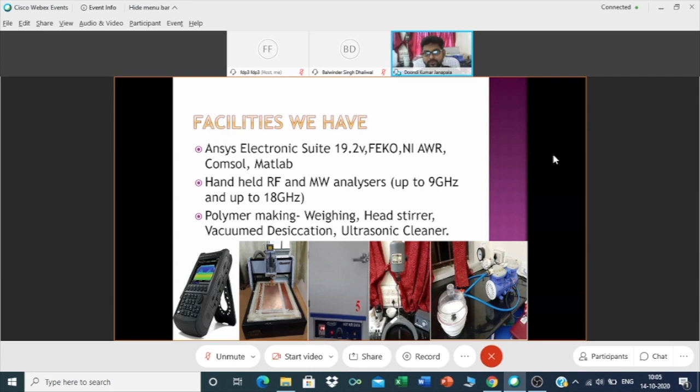So these are the current major things that I am working on currently. The remaining things I work on occasionally, but mostly I work on flexible antennas for wearables, especially for medical applications and medical antennas. I am working on both assistive devices and diagnostics, and also attempting therapeutics. I am developing some polymers for use as substrates for antenna fabrication or sensor fabrication, and I recently started working on conductive materials too.

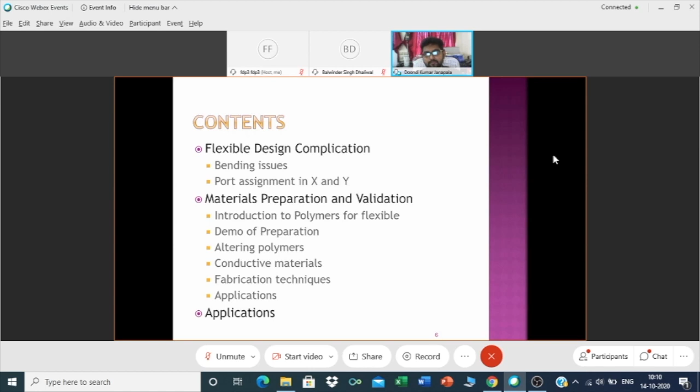Next thing is you can customize your own flexible material, and I can show you how to prepare that, how you can alter it, and how you can characterize it, and what are the conductive parts you can go for and how the fabrication techniques evolve based on the conductive material you take and the applications. So this is what I'm going to discuss during my entire session. I think this will be a complete guideline for starting your research and ending your research.

Now the main mistake anybody will do is they take the flat design very easily, as you can see here. But while bending, they make a common mistake where they just cut based on the bending radius. They take a few bending radiuses and give a comparison analysis. But how exactly can I do proper bending? That is the big question here. So in order to understand that, I will go to the next slide.

Suppose I'm going to bend my antenna, my particular substrate. Here you can see the inner radius is there and the outer radius is there. If I just cut it flat, the inner radius length is lesser than the outer radius length. If you are not taking care of that in your simulation, that means you're not having the length of your antenna properly at the bottom side and the top side, because the top side length of the antenna is more than the bottom side length. So that is the common mistake everybody makes.

Here you can see this is the excess part. This is the excess part one should remove when designing. Only then will you get the length of your antenna properly on the top side as well as the bottom side, only when you remove this particular part. So if you address this part only, your bending design in HFSS will come out properly.

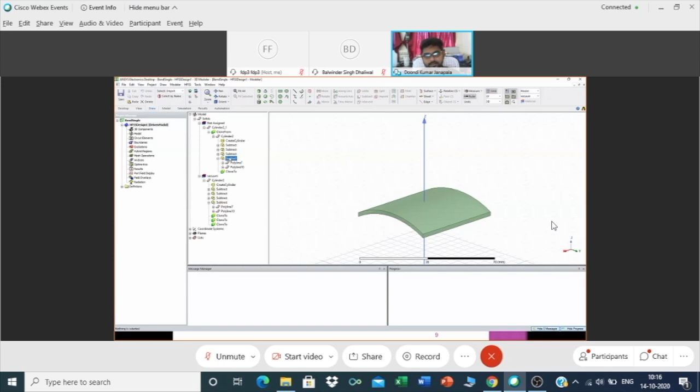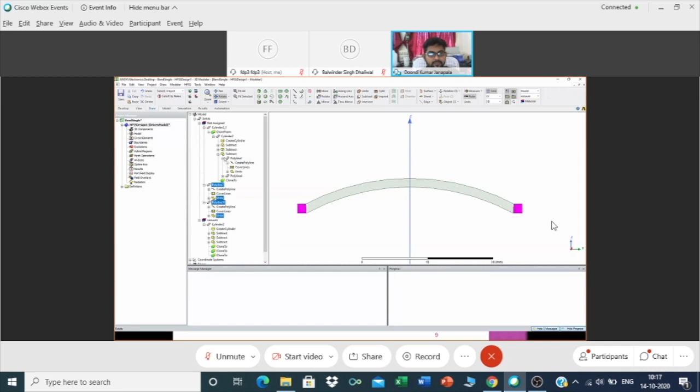These are the two extra parts one must eliminate while doing their design. These two parts need to be removed. If the extra part is not removed properly, then we will have a problem matching your simulated and measured results.

So for that one, we made a lot of calculations and did a lot of design especially for this. As most of you know, this simulation tool is HFSS, we have the 19.2 version here. At the initial stage, we take a cylinder, cylinder 1 and cylinder 2. Cylinder 2 contains cylinder 1, and the radius inside is what you want to bend.

Based on that, you will make it, and the upper cylinder will take into consideration the thickness of the substrate that you want. So you do that and subtract cylinder 1 from cylinder 2, then you will have a hollow space, a hollow cylinder here.

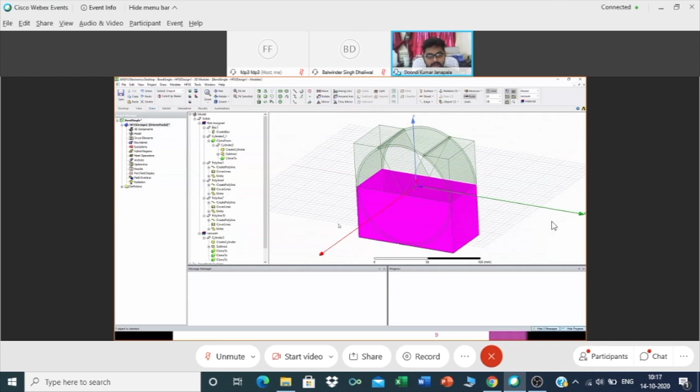Then after that, first you take a box and remove this first part, half part. That means you select your hollow cylinder first, and remove that box part, then you will get this particular part. Here is where our particular calculation comes into handy.

Now here you can see this line. This line, usually based on your 2 pi, this particular length, you will calculate how exactly you have to take the angle and take this one. But if I straightly remove this one, here you can see this is the extra part that is still remaining, so first you have to calculate and remove this part.

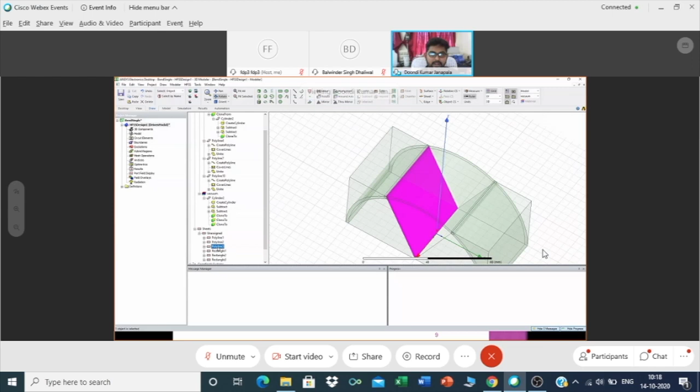For this one, I have selected individual lines, polylines. You can see these lines are all individually arranged together, so you can go for polyline sheets. First I draw only this particular face, then I drew similarly the backside one, then I drew this particular slant one, then I drew this particular one.

So on the bottom one and top one, after I made individual sheets, I united them and made a box. That particular box, the hollow half cylinder that we have here, you can see sx by 2, sx by 2 minus y1.

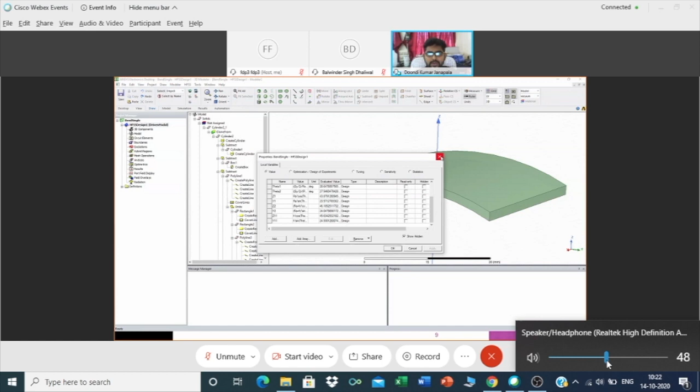So you give these equations, you enter them into your design properties, and instead of coordinates, you give your variables everywhere in your design. So everywhere in your design you can see all are done with variable instead of coordinates.

What it will help is, suppose now I want to work with some 30, I will enter 30. See the bending change it, you can see the bending change. Now I am going to go with the 70. See the bending change it.

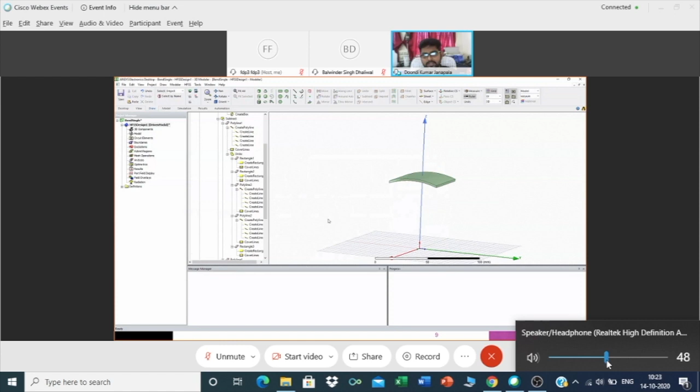Now again I want to give some 50, and the radius in axle length I want to reduce to just 20. Press OK, and you can see the length is reduced. Sorry, width is reduced. So this is the advantage of making your design with variables in the simulation tool.

If you are able to do this based on the calculation I have shown in those two slides, then your simulation time will be very easy, and probably you can use parametric study and do your simulation as fast as you can with the various number of radiuses.

Because when you do your flexible design, it's not necessary that you will get a proper reflection coefficient for every bending you do, because there is a limit up to what radius you can do bending. Beyond that, if you bend, your reflection coefficient may not come in the frequency you need, and it may not radiate properly either. So there is a limit to bend.

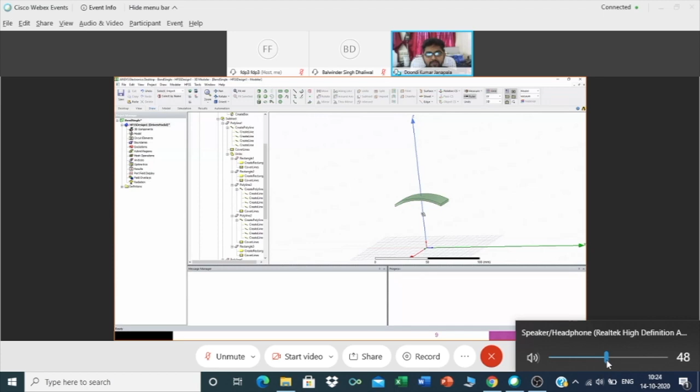So this particular way of design will help you find exactly what bending radiuses you can select, and you can compare for your research article. That is why I want to take 15 minutes to show you this thing before I go to my original presentation. I hope these calculations will be helpful for you in maintaining and doing your design easily.

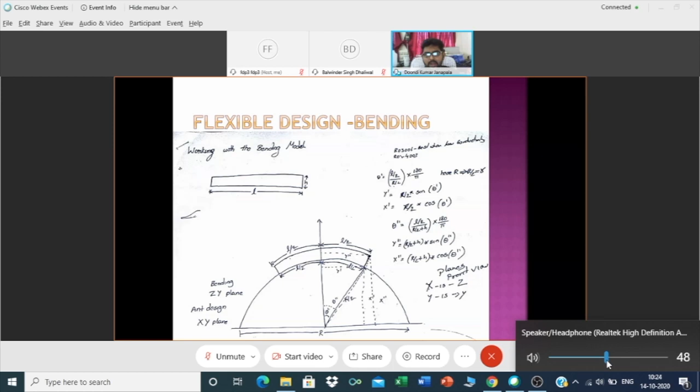So these are the calculations. This is the calculations that we did for everything, and you have to take note of these things only, and you have to enter them there, and you will get your bending design very easily. So I wanted to address this particular part while doing that.

Now, this particular thing is done. Now what are the other complications that you may face? Two complications you will face. So people either want to bend in x direction or y direction.

Suppose I want to bend here. So my antenna strip line is here. My antenna is bended like this. So bended like this in x bend. So my strip line is like this. Then in such cases I need to give the port here. But if I bend in y direction, then I have to give my feed here.

So how exactly you do this particular port assignment with the exact calculation? So that also I'm going to address. This particular modeling of the port in x direction is similar to the bending design that we did. So the calculations are similar here.

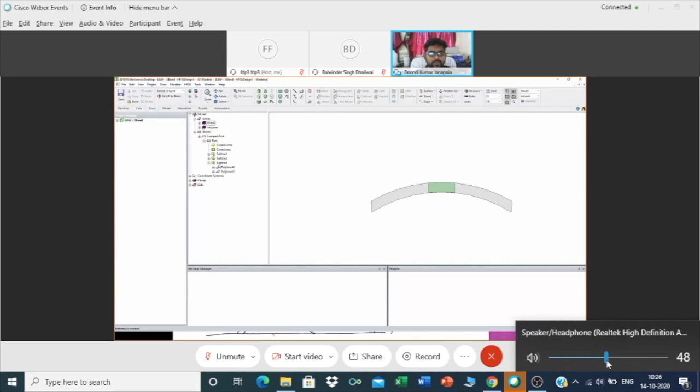So here I would like to show you that by removing also. See, whatever the design that I showed you before, now I'm showing the same thing in a 2D. So first I took a 2D plane of cylinders, a 2D plane of circular discs, and I made a hollow part. So after making a hollow part, bottom part removed and the edge parts removed. So the particular thing has come.

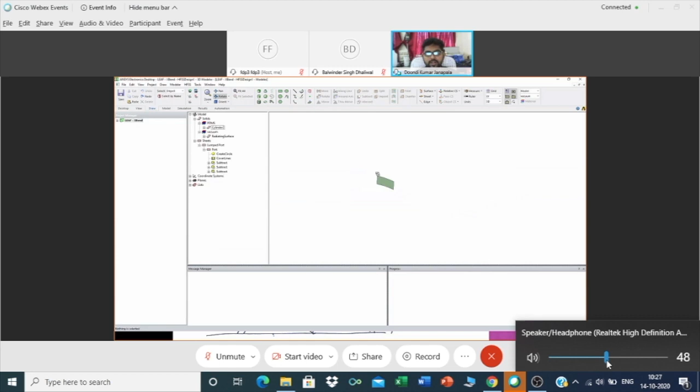Now in the previous design, if you are interested, do that from scratch and you will get enough practice. But if you want to finish your design a little easier, and you don't want to do the entire 3D modeling and only want to do 2D modeling and then get the 3D model, here's how you can do that very easily. I'm going to hide this view, hide in all views.

Now you can see only a small arc in 2D. Now in HFSS design properties, instead of fx, I will give some value like 20. So my length of my substrate suppose is 20. Based on that, I did only 2D modeling.

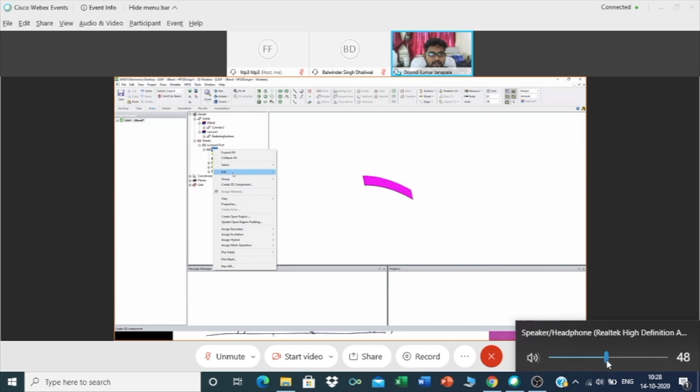Now I will select this, go to edit, surface, thicken sheet, and give some length. Suppose imagine the width of my antenna is also 20. Now you can see, so this is how you replicate only a 2D design and get your substrate easily with 2D modeling. You just need to set the thickness of whatever width you need using the thickness option.

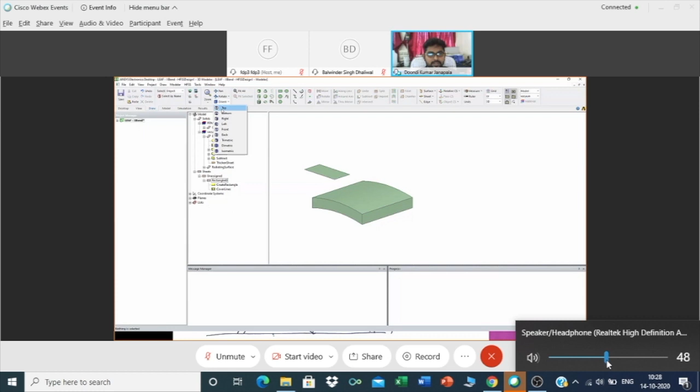The same thickness option is used sometimes when working with different conducting parts. Suppose you are having one sheet here, so you are wrapping that, and I will show you this also. Probably minus 2 comma minus 2 comma some 100.

As you can see, I will select this one and this one. Okay, edit, surface, wrap sheet. Okay, sorry, this length is a little less, I think.

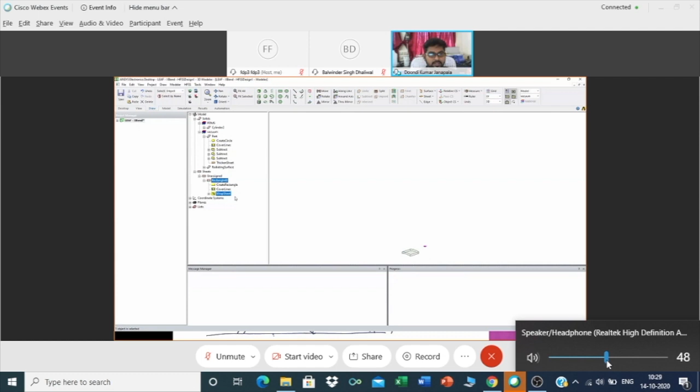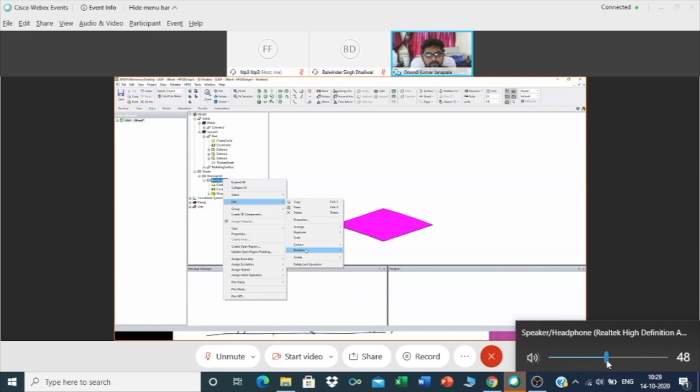So what I want to show is, if you want to work with some silver nanoparticles or copper nanowires or something and you know the conductivity value, normally most of the time when you use the simulation tool, we just select this particular part and for the radiating part we assign boundaries and perfect E. But instead of that, you can just give edit, surface, and thicken sheet, and give, suppose you're working with some 35 micrometer coating or something, you can give that and press OK, and you can see it got some thickness.

You can particularly select that one, and instead of vacuum you can select that particular material, add material, suppose silver or something, and give the relative conductivity value and validate your material and press OK. So in that way you can assign a particular conductive material that you are choosing for your fabrication. You just thicken your sheet and assign that value. So that is the thing I wanted to show.

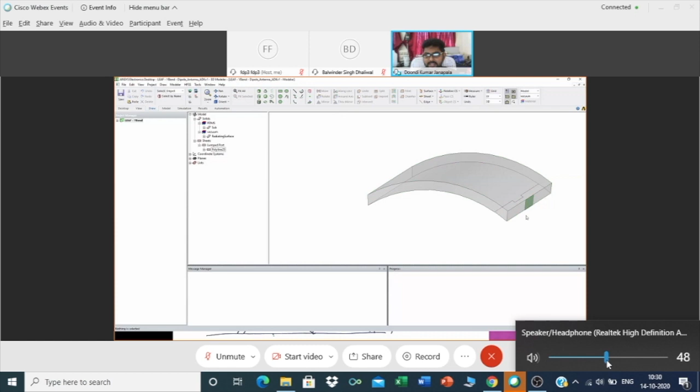In a similar way, another one is this one. This one is actually quite easy. The port assignment in Y bending is quite easy. Now imagine your strip line is here and your antenna is bent in this orientation. Now your port is here. For this port, this is a very simple one compared to the port in the X direction.

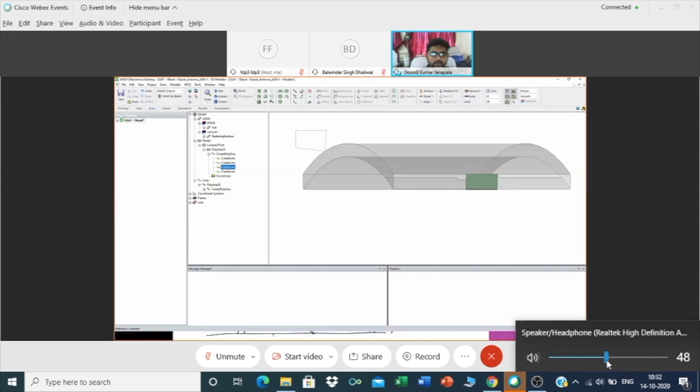So this is how you do X bend and Y bend, and the port assignment is different in X bend and Y bend. The calculations are simply different. Compared to X bend, giving the port in Y bend is quite easy because you don't need to do much here. You just take a sheet and give the coordinates, that's it. But for X bend, the port calculations are similar to the bend design we do. So that is one thing you should take care of, and it will take some time. In this way, we can go from single bend to multiple bends. So I wanted to show you these two.

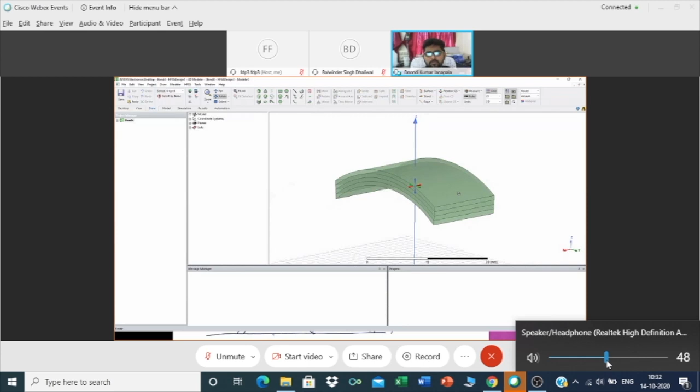So here you can see I have done 4 layers of this particular one. Suppose if you are having a very good system and processor capabilities, if you want to do SAR analysis, you can select the phantom models available directly in the license version of ANSYS HFSS and use them. But what if you don't have that phantom model, or it's taking too much memory consumption and you don't have enough memory to compute all these things using the real-time phantom model?

In such cases, most people go for a 4-layered model of skin human tissues. The layers are skin around 2 mm, fat around 5 mm, muscle around 7 to 10 mm, and bone around 10 mm or so. So you take that as the flat condition.

Now I am giving you a glimpse of how you can take that 4-layered structure in a bending condition also. Once you do one bend, it's very easy to do a number of bends. The same procedure only I will follow, but for the first layer I took H as the thickness, second layer I took HS. For the first layer the radius is Ra, for the second layer it becomes Rs equal to Ra plus the thickness of the first layer.

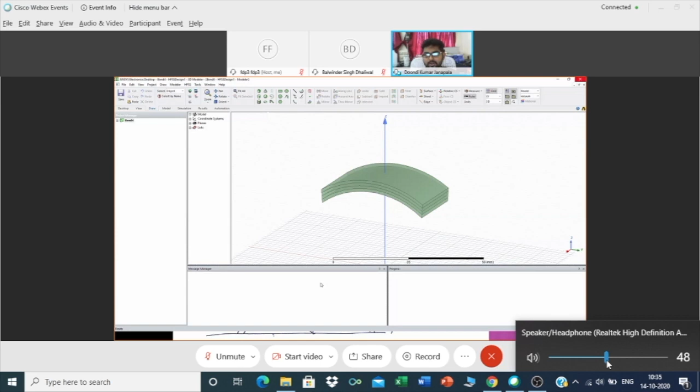So you make this design one time and you can use it for all of your research a number of times. That is why, in the initial stage of my research itself, I designed models from single layer to 4 layers and kept them for further use. This probably you should start with first.

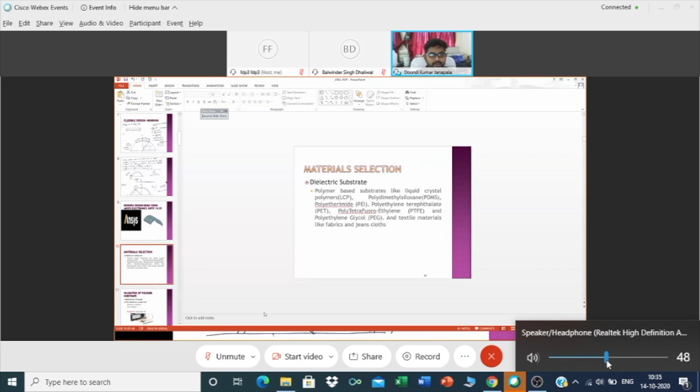Polyethylene glycol is hydrophilic, but if it reacts with water, it will get dissolved, so most people won't go for that one. But in the world, the most commonly used one is polydimethylsiloxane, PDMS. So I'm going to take this particular polymer, and with its help I'm going to show how you can do different things in flexible antennas.

Now, before we go further, the main problem when you are customizing your own polymer is validating your dielectric properties each time. Suppose if somebody is working on materials that are already available, like FR4 or Rogers, you can go to the particular website and data sheets will be available for you.

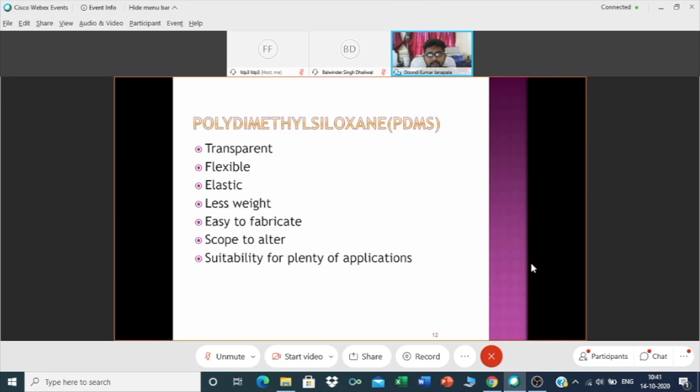So this is the polymer. It will be very, very sticky, so use gloves, because even if you wash it off, whatever you use, you will still feel the stickiness in your hand if you touch it directly. So this is the polymer.

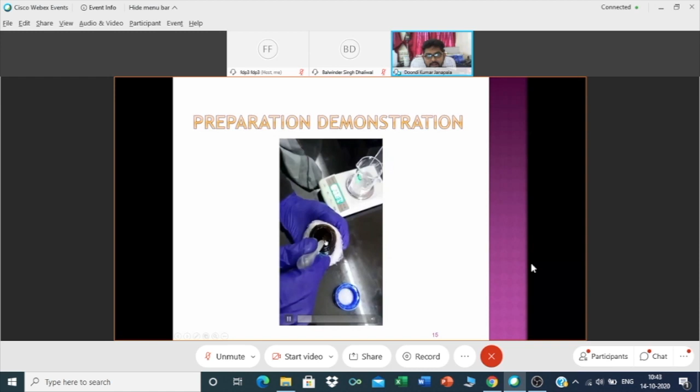Once you take the polymer, then you take the hardener, in a 10:1 ratio. Suppose if you are taking 22 grams, you have to put 2.2 grams of hardener. So that's how we are taking it.

As a matter of fact, you can mix with your hands also for 10 to 15 or 20 minutes. But I will advise you to go for overhead stirring, because this particular composition will be mixed very, very nicely and your polymer will not become brittle and break easily.

So once you make it, there will be thousands of bubbles formed. Yes, here as you can see, it is fully bubbles. So here this is called the vacuum desiccation process.

This is the desiccator, we place it inside, close it, and keep the knob open. This is a motor where we connect it with the pipe system and put some pressure. So this process is like you are sucking the air out of this particular pot, and when it's pulling that air out, these bubbles will come up.

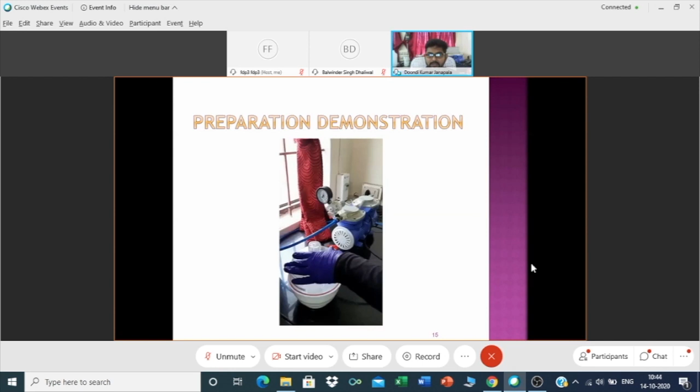So this is the process of removing the bubbles. Here you can see I am putting some pressure to it, so then these bubbles will come up, I'll show you. Here you can see the bubbles are coming up from your solution, because even if you leave a single or a couple of bubbles, they will affect your characterization and your measurements also. That is the reason the desiccation process should be done until the bubbles are fully removed.

There will be a couple of bubbles on the surface of your beaker that you can remove probably by just blowing some air to it, or you take a sharp needle and pop them. So here I'm going to show you. Here you can see the bubbles came up.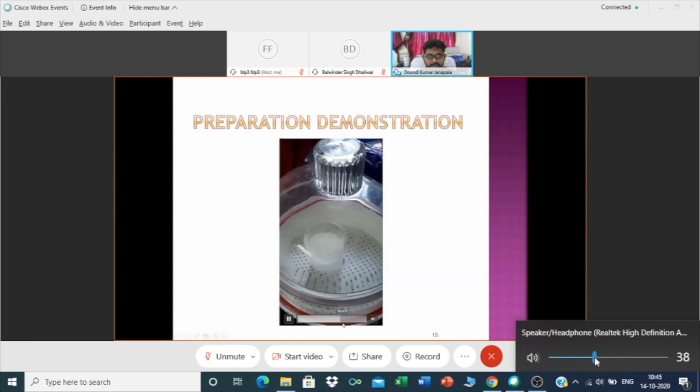Now the bubbles are going inside, see the bubbles are reducing. When I release the air pressure, the bubbles are again popping, slowly. So see again they are coming up. When I start the process, they will slowly come up out of your solution. And when you start releasing again, these things will go down, see here again they are going down. So this process you should repeat for a couple of times so that the bubbles are cleared and you get your crystal clear solution without any bubbles.

So this is the reason we do vacuum desiccation, to remove all the bubbles.

After that, you can make here, I am showing this one. This is the mold I made using my glass plates, 1 mm thickness samples, because I want to test all the samples with the same length and same thickness, so that I can compare while putting the paper. So for the demonstration purpose, I made this one. But if you are working on the antenna, probably you might be working with 50 mm by 50 mm length and width of your antenna. It's a thickness of 1 mm, maybe 1.5 mm, maybe 2 mm.

It's up to you, you select any thickness and any size you want to work with. But I will advise you, suppose if you want to work your antenna at 50 mm by 50 mm, probably try to make a little bit bigger polymer, because the edge parts will have unevenness. So it is mandatory that you make a little bit bigger polymer and cut the edge parts, using the middle part 50 mm by 50 mm.

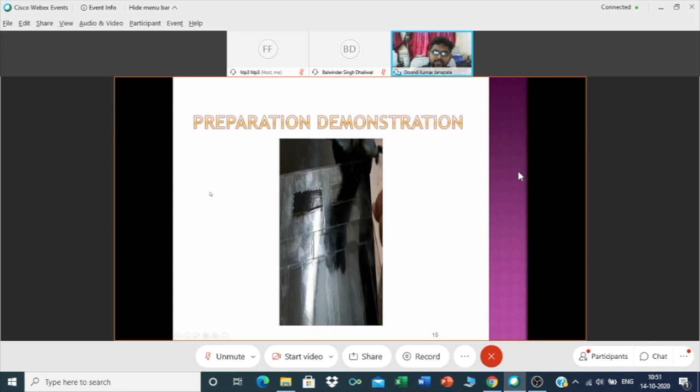To make this video, I actually baked it at a very high temperature because I wanted to complete everything in a single day. So I baked it, and after that you can see while peeling, I have to go slowly first. It will be attached to your mold very strongly, so I have to slice it down at the corners properly before I remove it.

Then I should go for removal slowly. If I am not slow enough, since I did high-speed, high-temperature annealing, it will break a little more easily. So you have to be very careful. You can see it broke a little bit here, so be careful while peeling. You will get it off slowly.

See, a crystal clear polymer sample that I made. So this is how you simply make it: just take a 10:1 ratio of your polymer and mix them very well using the head stirrer. The head stirrer will cost you only 10,000 to 15,000 including GST.

For the weighing machine, if you want to work with nanomaterials or similar, you should go for a lab grade weighing machine. Otherwise a simple weighing machine will be enough. That head stirrer is probably 15,000, and the vacuum desiccation setup, including the motor, costs around 12,000.

The desiccation pots are available in different sizes. Please go for a smaller size, because if you go for a bigger size it will take a lot of time to desiccate. Go for the smaller version so your time is reduced. That will cost around 2,000. The pressure controller and that thing will cost around 1,500. So the entire setup is around 15,000 to 20,000 for a basic one.

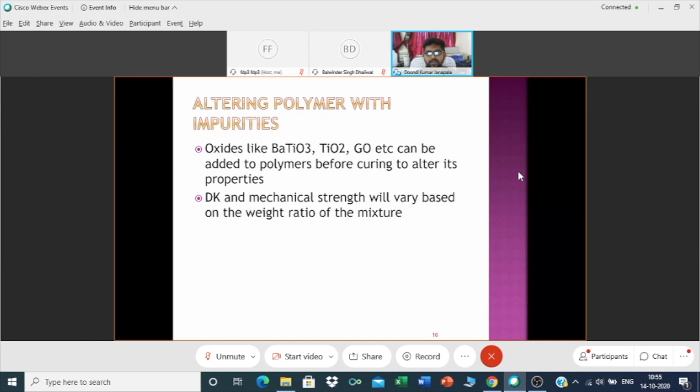So for this one, the entire procedure is similar to the previous one, but there are a few things you need to take care of. Suppose you're getting a nanoparticle directly by purchasing from a vendor, you can probably mention in your paper that a particular GO grade number so-and-so is purchased from so-and-so vendor.

Like that you can mention in your paper directly and proceed with your explanation. Or, you can make your own GO using your own methods, and there are different variations of GO methods in material science papers. But when you make your GO particles and dry them, this is how it looks. The nanoparticles are grouped together, like a wafer here, as you can see.

What you need to do is take this mortar and pestle and grind it slowly and properly, so the nanoparticle mixture becomes very fine. This is called a spatula, and you use it to scratch that and take it into consideration.

Now here, a practical demonstration again. First I will take a weight ratio of my particular GO that I made. After grinding it, I take that particular portion, mix it with a little bit of deionized water, a drop, and ethanol, and I put that beaker into this particular equipment.

This is called ultrasonication. Your polymer uniformity will depend on how well your GO particles are dispersed into the solution you took. So you should consider reading papers on nanoparticle dispersion into various solvents.

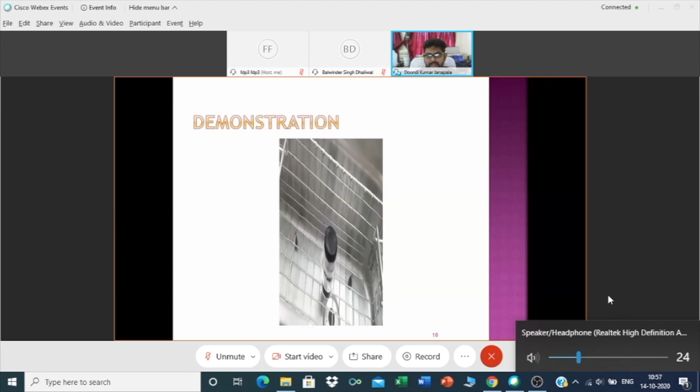I will give you some reference for that too. This particular equipment, the sonicator, a basic one costs around 20,000 or so. It vibrates at a very rapid speed, and your nanoparticles disperse into the solution very uniformly. That's the reason we use sonication.

Once you mix it properly for about 20 minutes and your mixture is very uniform, you put it into your beaker with the PDMS that's already processed and had bubbles removed, and you pour it in. I took 2 grams of this solution and around 7 grams of polymer, mixed with base and curing agent, degassed to remove bubbles, and added that.

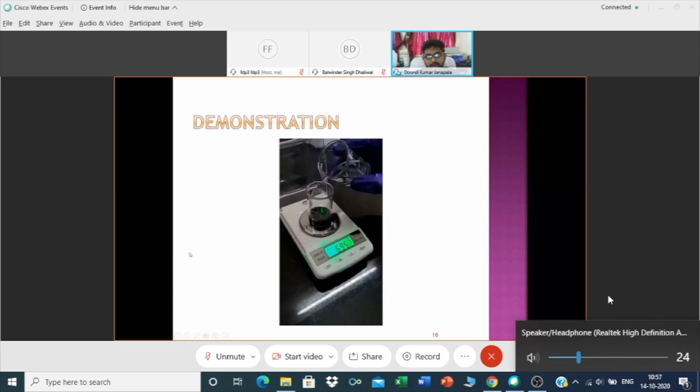The process you have to follow uses the chemistry I showed you before. You mix it and put it in the sonicator for 1 to 2 hours so the particles mix well into your PDMS uniformly, then pour it into the mold just as I showed you previously. I wanted to save time, so I put that in directly.

So I baked it, and this is how you remove your polymer. You can see this is the impure polymer, the GO-embedded component. Actually, there's a natural-based resin component I added to this one, which improves the mechanical properties a little.

I will give you another demonstration of different polymers we made. Suppose this is a pure polymer. Normally when you make it, it feels a little sticky when you hold it, so you clean it, spray some ethanol on top, and use a hot air dryer to dry it, and the stickiness will go away. Sometimes, if you're not baking it properly, it won't peel off properly.

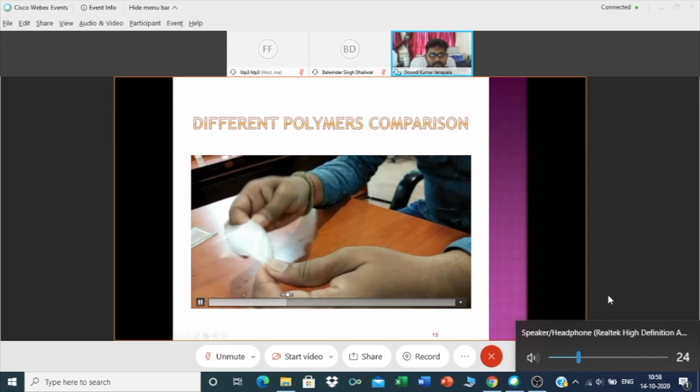So that's another thing. Now here's one nature-based resin polymer. I wanted to improve the mechanical properties of my polymer, so I looked into making natural-based copolymers embedded into this particular PDMS. This is one such polymer I made; its mechanical strength is a little better compared to the pure polymer. Another one is the TiO2 polymer.

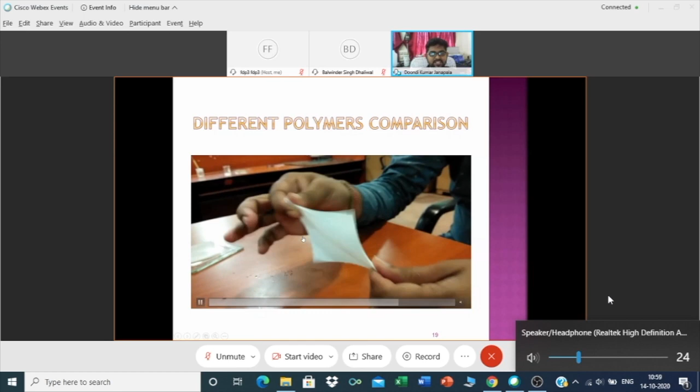So this is the TiO2. I have taken the white one and mixed it into my particular polymer, and this is the polymer we get. Now, why? You can see this elastic nature is better than the pure polymer. So I will compare that to you in my hand.

See, you can see my TiO2 polymer is flexing better than this pure PDMS. This is the reason I am going for altering polymers in a different way. The process is just like how I did with GO: you have to mix it, grind it finely, put it into solvent, disperse it using sonication, then put it into polymer, do hand stirring, degassing, pouring, baking, and peeling off.

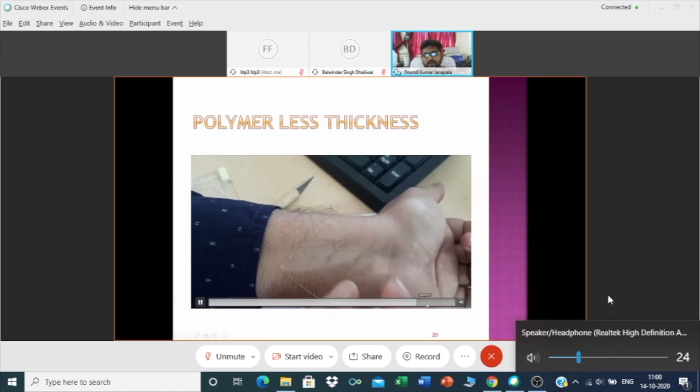So now this is a lesser thickness of the same polymer, made for pressure sensing and some direct skin contact applications like sensing. It's just 0.02 to 0.03 thickness only, but it will tear very easily. That is one reason I want to improve its mechanical strength, so that's why I was altering it.

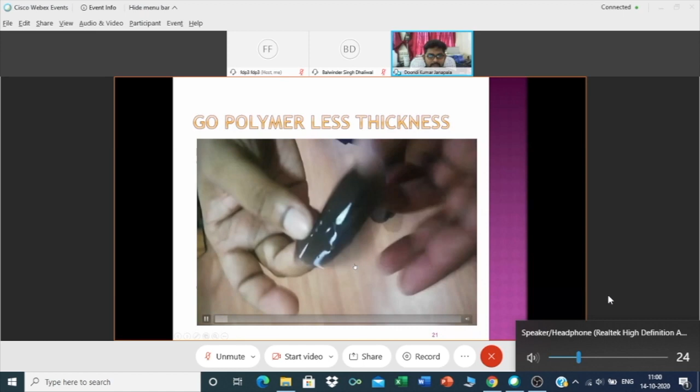This is one functionalized graphene prepared by my Professor Balwinder Singh sir, which I used. Here you can see the polymer is very less in thickness, and it's very good in elasticity. You can see very good elastic stability.

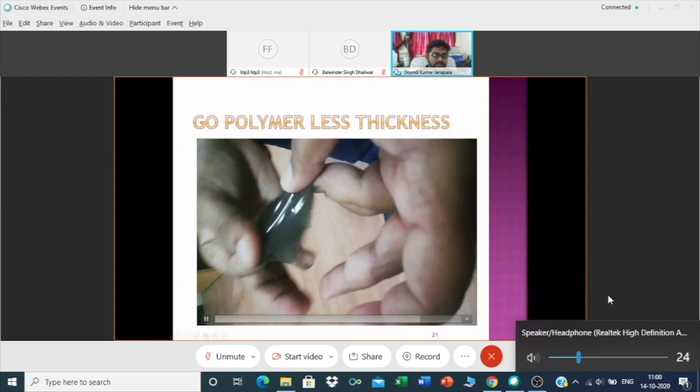So this is another one we worked on, but the thing is when I mix it, a couple of problems I am facing are some bubbles forming while baking, even though there are no bubbles when I put it inside. This is probably due to the maintenance of a little bit of pH quantity when I mix the solvent. So I am actually trying to adjust that particular point now.

Next thing, when you see most of the wearable antenna literature, you can see most antennas present SAR analysis like this: the antenna is placed at a minimal distance of 5 mm away from the phantom, 10 mm away from the phantom, and given a 100 milliwatt input. Like that, they project the SAR analysis in the paper.

But in reality, we can't expect our antenna to be in the air at a 10 mm distance — it will not float, you should be having some spacer. There are very few papers that actually address that issue, and they take into consideration some polymer-based spacers like PV or something. The spacer also, they take 3 mm or 5 mm, and they place the antenna with the spacer in between the antenna and our human body tissues. So I wanted to work on that also.

They're using sugar cubes to make the polymer substrate. So I made it with pure PDMS, TiO2, as well as GO embedded. The TiO2 sample, while cleaning it, got dispersed and it failed — you can see some of the polymer broke and dissolved while I was cleaning it.

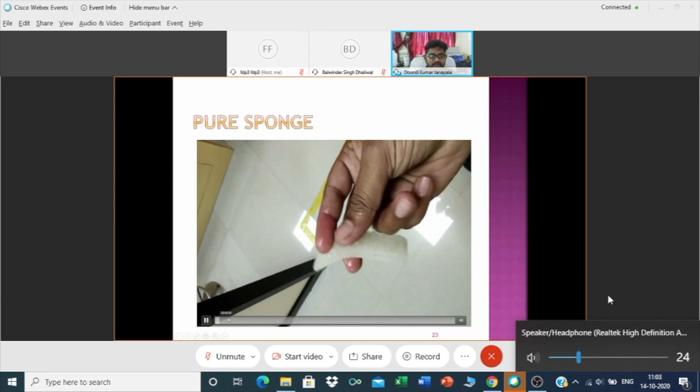So here you can see this is pure polymer sponge. This one has more applications — I will tell you what the applications are. And this is a GO embedded sponge.

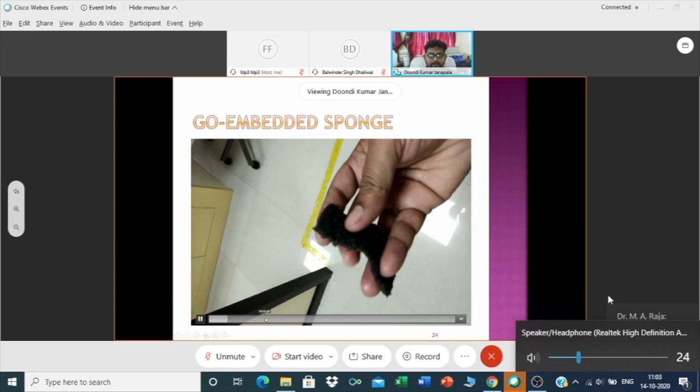My idea of working with the polymer sponge is to use it as a spacer. One is I wanted to reduce the SAR using this one, and this particular GO-polymer and these sponges will have high dielectric properties. I want to adjust this in order to isolate the body's effects on antenna performance, because our body's high dielectric properties will affect antenna performance. I want to isolate that.

Another thing is, if you put an antenna directly on your body's skin, this particular polymer will close your skin's holes, and after some time you will feel irritation once you start sweating. If you have the sponge as a spacer for wearable applications, this sponge will give some ventilation to your skin and you will feel more comfortable.

One more thing is, this is the basic stage as a dielectric sponge, and you can activate this polymer and do the electrolysis process, and use it as a conductor also. This is how people are using this particular polymer sponge for triboelectric nano generators. So for energy harvesting purposes also, people are using flexible triboelectric nano generators using oxide embedded polymer sponge, which is ultralight.

This is another application you can work on. If you want to make a hybrid model antenna along with a flexible energy harvesting mechanism, that's one thing. I am at the baby step and I started that. Probably I will complete the remaining two stages and check its compatibility with my work.

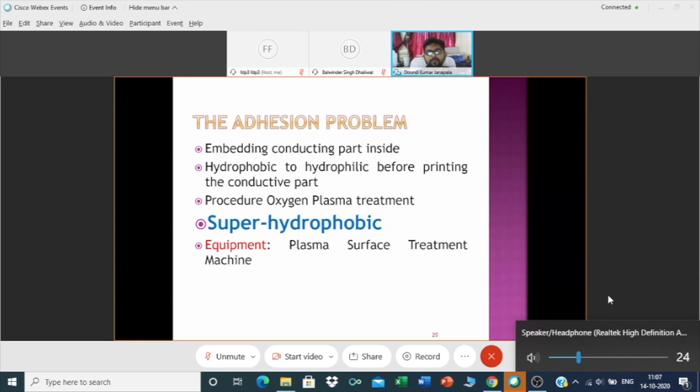Why am I highlighting super hydrophobic here? Super hydrophobic means it will have no reaction with whatever water content is in your printing part - no reaction at all. This super hydrophobic nature is very important for people working with microfluidic channels as well as implants, because when implants are coated with this super hydrophobic polymer... suppose you have an implant inside your body, after some time it becomes a foreign body, and it may react with your body fluids creating harmful effects that could damage your body over longer usage. But when you work with super hydrophobic coating, those body fluids will not react with your implant, making it good for longer usage.

So for this plasma treatment, first you have to pre-treat the PDMS surface. You expose it to air plasma treatment - suppose you have a glass desiccator, like the one I showed you previously, you suck the air out of it, fill it with air or oxygen, put it into the plasma treatment machine (plasma cleaner), and expose it for 1 minute, or shorter durations also work. After activating, rinse it with ethanol for 10 minutes, repeat this process 3 to 4 times, then air dry it, and you will get your contact angle.

But here I am facing one problem: the polymer activation is not even entering the surface. So I am checking where I am making the mistake.

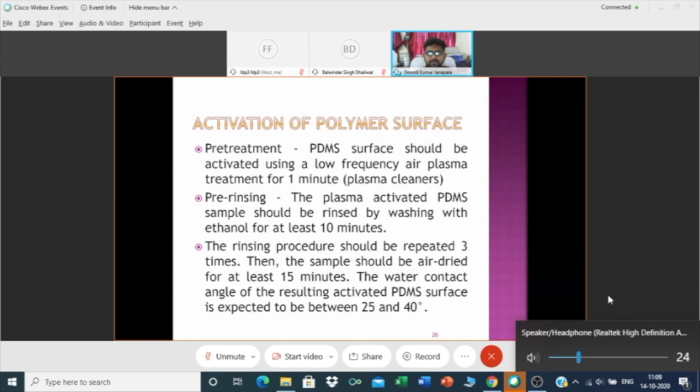Now, material selection for conductive part. This is something I started recently. You can work with copper foil, conductive fabrics for textiles, and conductive inks using nanoparticles like copper, silver, nickel, and graphene.

When you are working with nanoparticles and nano inks, you have to measure their conductivity first and give that value while simulating inside your simulator, so that your results will be in good matching. If you just give PEC condition for your conductor, but use some other material, simulated and measured results may not match. So it's better to estimate its conductivity and give it into the material selection of your simulation tool.

So for fabrication, the flexible materials which are available - these are the things. You can directly use a lab, give your CAD model, and they will do the fabrication and give it to you. Sorry, I am going a little faster because I have to complete a few other things.

In case of textiles, you can take the conductive fabrics, or any cloths available, and use some particular equipment. I will show you in a later slide.

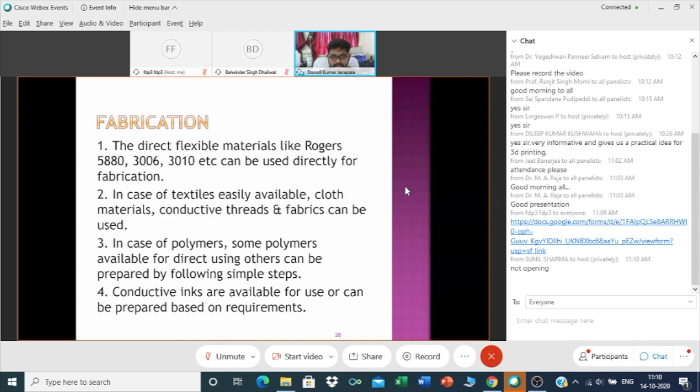In case of polymers, some polymers are available, and you can customize your own polymer. Conductive inks are also available with proper pH monitoring and everything, or you can make your own. Printing the antenna design and substrate, attaching that particular antenna part, is the basic one.

You can start with this, taking a copper foil with 0.05 mm thickness. You give your CAD model to EDM, electrical discharge machining. This particular device is more familiar to the mechanical department people. They use this for cutting solid parts.

What they will do is make your foils - they will keep a number of foils on top of each other and make it look like a solid brick. So copper foils are stacked together and made like a brick. Then they put it into their machine, give the CAD model, and cut that particular part.

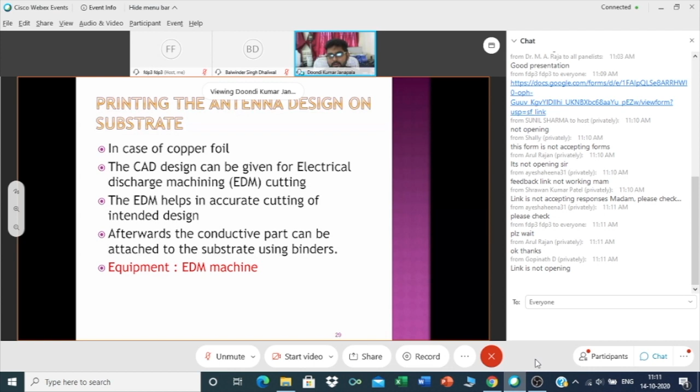Then you can use some adhesives or binders like glues or something, and attach that to your antenna part. That is what I showed you in my first glimpse of my antenna. So that is where you will get that.

Now, with conductive nanoparticles, you can go for roll-to-roll printing, screen printing, but don't go for doctor blade printing, because it's not suitable for us - our particular polymer is elastic in nature. When you put the doctor blade and try to do the printing, your polymer will elasticize, so that particular coating will come out like a wrinkled model. It is not suitable for us.

You can use deposition techniques, but they may not be available for everybody - the deposition techniques and that high-end equipment. And one more thing: if you are using that equipment, you should be careful not to contaminate that particular high-end equipment.

So these are the material printers - spraying, this is a setup, and spin coating. Actually, I wanted to take a video of this thing too, but unfortunately that lab has been closed for the last 5 days. People are not coming properly because of this COVID situation. But I will try to show you a few things.

This is a particular material printer commonly used by most people. Apart from that, the easily available ones are the Epson L20 series or P50 series. If you take this, don't fill it with any ink - the direct first use should be your conducting particles directly.

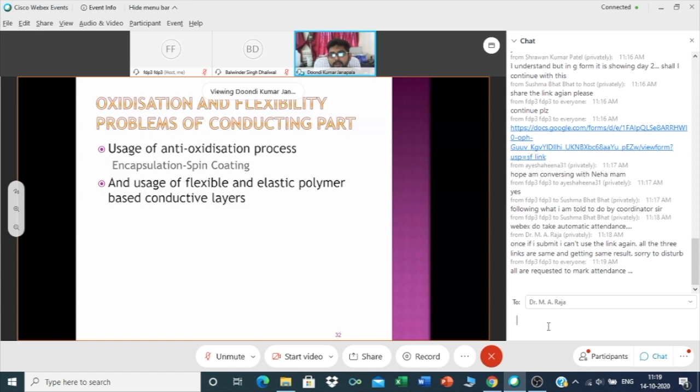So regarding flexibility, the conducting parts we are attaching now are flexible but not elastic. When using this for wearable applications, for mounting on sports people who exercise or play sports, the antenna must be elastic according to their muscle flexibility. Your polymer is elastic, but the flexible part is not elastic.

That's the reason people are now embedding conducting nanoparticles into polymer, making polymer-based conductive layers. These polymer-based conductive layers will have some elasticity too, which is one advantage. I haven't tried this part yet. I tried it with graphene, but I faced some problems with curing, it still looks a little liquid even after leaving it for a longer duration.

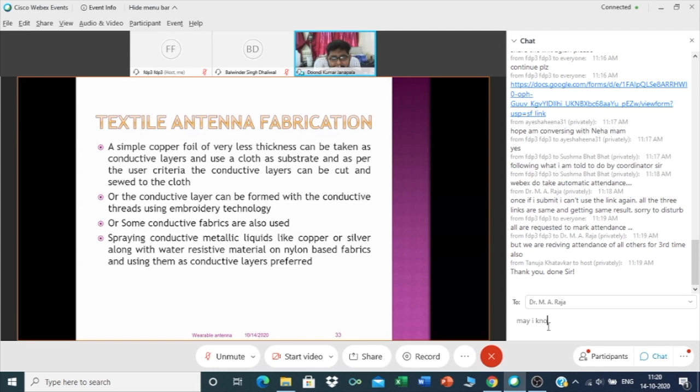You take a PDMS brick of 2 mm thickness, give your design as a conductive thread, and it will embroider into the polymer. You give your CAD model, and it does the embroidery. You can use spray coating, or give your copper foil to EDM cutting, and attach that to your particular textile. So that's another method.

Now, apart from the usual data, what I want to add is that most of these textile antennas suffer a few issues over longer duration that need to be addressed. The polymer we discussed until now is repellent to water, so there's no wetting effect. But with textile antennas, because of sweat, rain, or something else, it will probably get wet. When water content mixes into the fabric, the antenna's characteristics will automatically change.

Another thing is avoiding cracks and damages. When users wear a textile antenna, the threads at the outside edge parts will peel off one by one, and the threads will come out. After some time, the conducting textile part won't be maintained and will come off.

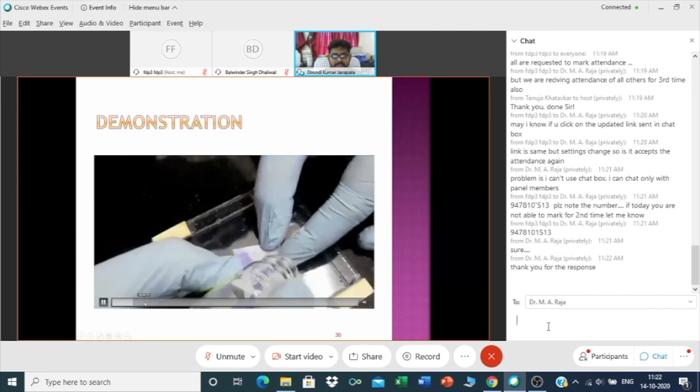I have a very small quantity of this copper conducting part, so I was just coating the entire cloth part with the copper conducting part. Make sure there is no white part left, the copper nanoparticle should fully cover it.

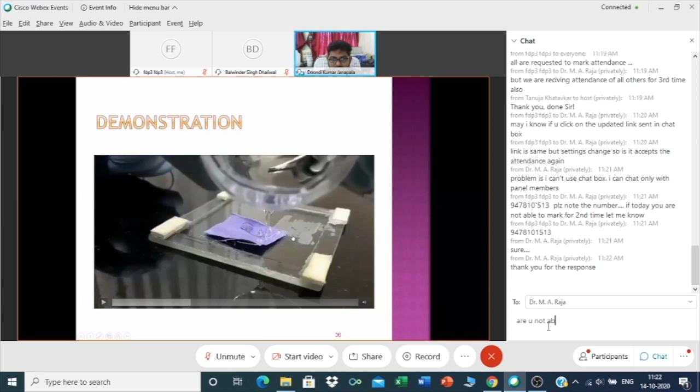Usually, I prefer fixing this particular textile as flat as possible without any crumpling, then only I will proceed. I will take some extra part and fix it properly to the surface without any complaints, then pour the polymer. But since I want to make this video faster, I did it a bit hurriedly, so I poured the polymer.

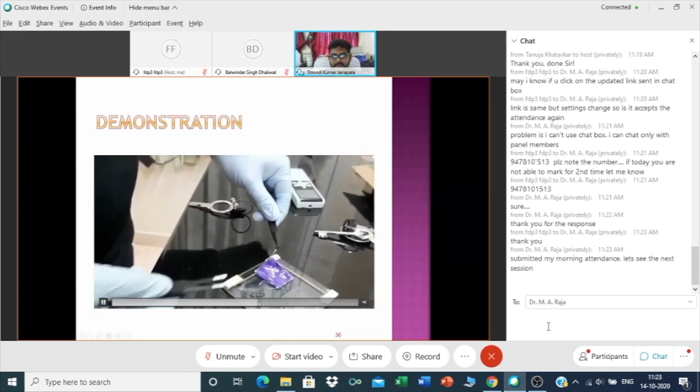Normally, I wouldn't pour the polymer like this, I would use spin coating so the polymer distributes equally and evenly throughout that particular textile part. Here, I'm removing the excess part by lifting up the sample. The excess polymer will come off, see, you can see it's dropping off.

Now, see, this is the thing. I let it cure for a longer duration at room temperature. Monday, I started this one. Today it's cured, and this morning I took the video of this particular thing. You can see your conductive fabric is embedded into the polymer, and the edge parts won't come off. These threads won't come out. Your conducting particle is folded properly, so the threads will not come out of it. That makes it very nice. So this is something you can probably add to your research.

So material assignment in HFSS, I'll probably show you simply.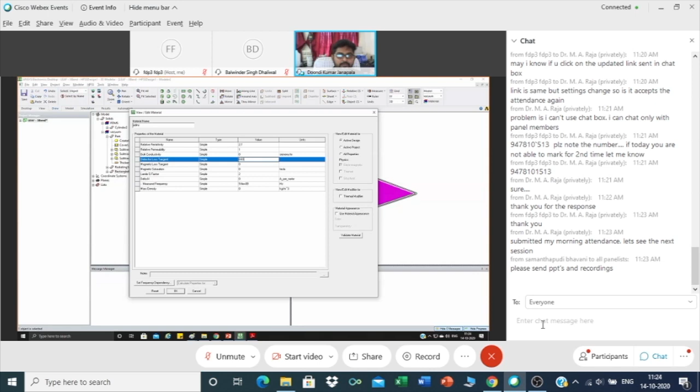So here, simply select your particular substrate, and you go here. Normally it's filled with vacuum. You go to edit, go for add material. Suppose you made PDMS, you select PDMS, type PDMS, and go for relative permittivity 2.7 and dielectric loss tangent around 0.0314, validate your material and press OK. I think I already added the polymer, so it's showing it's already there.

Normally that is how you add it. So you can select some other name, add probably 2.7, and as well as give dielectric loss tangent of 0.0314, validate and press OK, then press OK again. So you can see that particular material you created is assigned here.

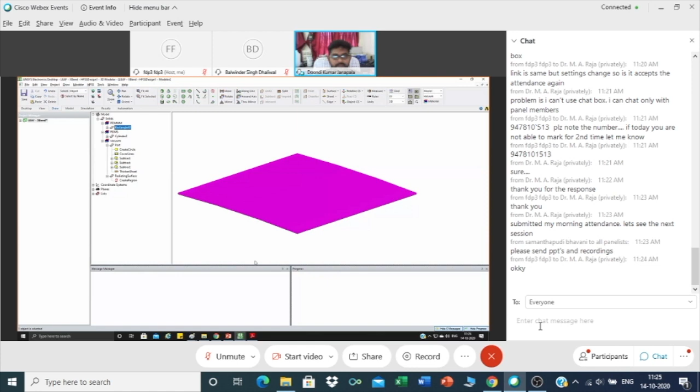This is how we take your skin, fat, and muscle also. So for skin, fat, muscle, bone, and everything, for different frequencies, if you want dielectric properties, you may work at different frequencies. To get to know those dielectric properties, you type 'C. Gabriel dielectric properties of human tissues' in Google. You will get one website. In that website, you enter the frequency you want and press OK. For all the human tissues, you will get the dielectric properties, and you add those dielectric properties in the simulation, and you work with that.

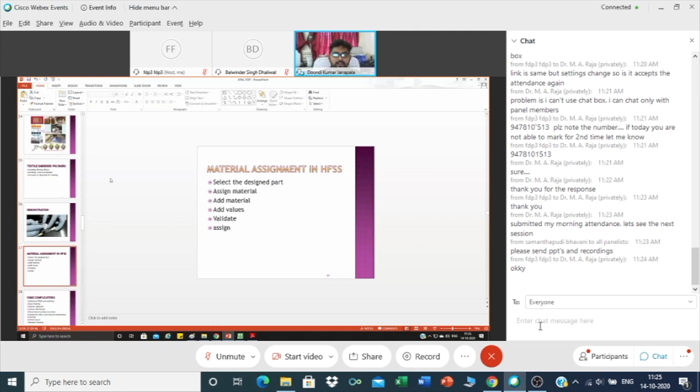So in a similar way, having added the dielectric properties of the polymer, you can add the conductive part also. That is how you work with it. So assigning material is the steps that I showed.

So one complication is if you are not curing your polymer properly, it will be a little bit sticky, and while peeling off it will break. Sometimes the polymer will stick to your mold. In such cases, beginners can use a universal mold release spray, silicone based. Spray your mold with that, clean it, then pour the PDMS and it will peel easily. If you don't cure it properly, or if you're not baking it properly, it will break easily.

The uneven substrate distribution that I already explained, be patient with that — uneven distribution of nanoparticles. So sonicate it, make sure it's distributed properly. Surface activation sometimes partially fails; that is one complication you can face, so try to rectify that.

Conductivity of these particles and pH maintenance is another issue. If you leave the solution for some days, nanoparticles will group together, and when you directly put it into spray coating or something, it will clot. So you need to address the clotting problem by making sure the pH is maintained. Also, brittle nature — if you add too much oxide into your polymer, the polymer will become brittle and break easily.

Residual cleaning is also an issue. After all this process, the toughest part of this research is cleaning your vessels. If you leave the vessels for a few days, the polymer residue will get hardened, and once hardened it is hard to clean. If there is any residue, I prefer acetone to clean it, which works very well. Each time before you start, clean your vessels with acetone and use a hair dryer to dry them, then start the procedure.

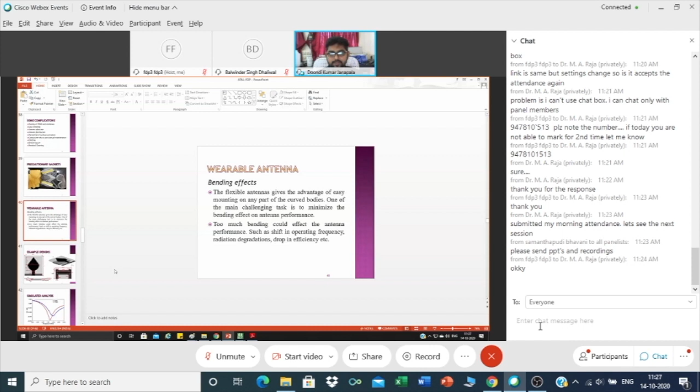Just like that affects, the human body also affects, because of the high dielectric properties, mostly the particular dielectric simulation reflection coefficient will tend to shift to lower resonance. So that is also you have to take care of. Here also I am showing that while bending and in flat condition, I kept it on body, so the effect is there. It's shifting.

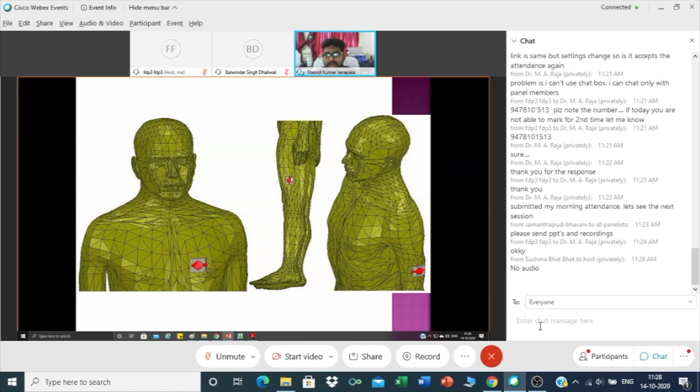Now on body analysis I have taken, and another analysis you can add is you can put your antenna at different portions of your body in a CAD model, and take that CAD model into ANSYS Savant tool. In that Savant tool, you can fix your antenna on top of your body at different parts.

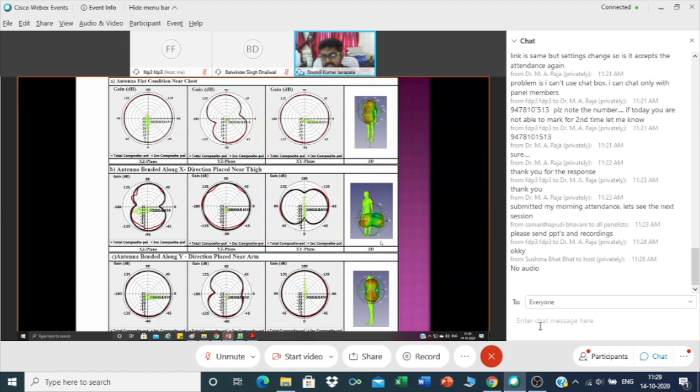So when it's placed on the chest, this is how your radiation is coming with respect to your body. When you put it on the thigh, this is how your radiation is coming. When you put it on the hand, this is how your radiation is coming. So this analysis also you can probably add to your research article to make it good.

But instead of that, I wanted to do it without taking the second layer. I wanted to position my metamaterial structure in such a way that without using any secondary layer, I can achieve SAR adjustment, bending adjustment and on-body adjustment.

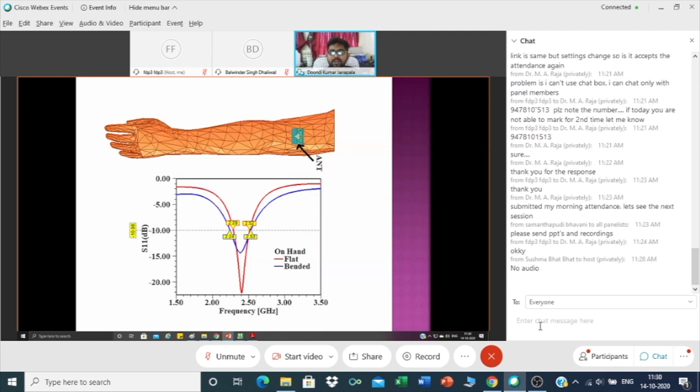So if you start your antenna wearable research, this is what you should address first. Then you can add your application — whatever application you want to work on, medical application, diagnostic application, any application — and you can add that as a novelty to your work and project your research.

Another validation you can add is, in the simulation, you can take the TX to RX coupling analysis. So you put your antenna in the simulation here, and you put another antenna at some distance, 1 meter or 2 meters, suppose you are monitoring the health of your particular patient. So you can see how this particular antenna is transmitting signal to that particular one, and what is the TX to RX signal, the coupling signal.

Probably for this telemetry application, it is better if you are getting at least some minus 70 dB coupling, or some papers suggest minus 80, minus 90 also works. So probably you try to improve that further, and you can project that also as an added advantage to your research article.

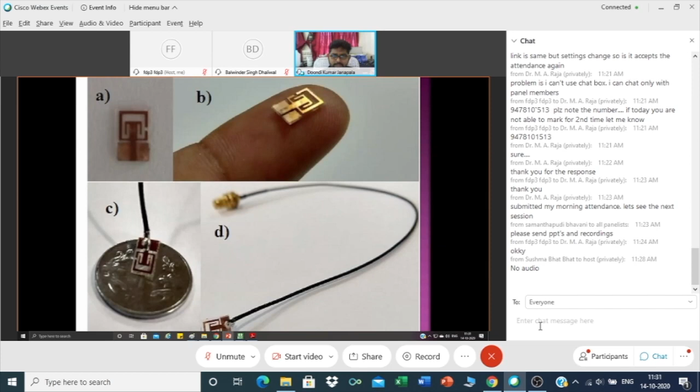So this is a fabricated one. Inside the meat, we kept the antenna and we gave the comparison of it.

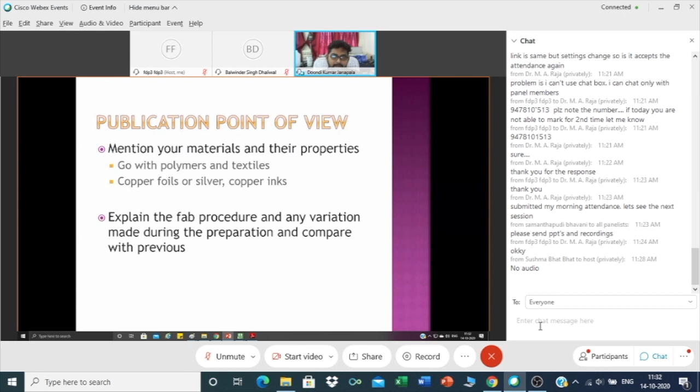From a publication point of view, you can add your preparation of particular nanoparticles or polymer preparation, the fabrication procedure you added, in one section of your research article. You can compare the same graphs and its mechanical strength with existing works and explain why you went for that. All these things you can add apart from the novelty of your original research. This will give an added boost, and you can go for submitting this paper into several interdisciplinary journals.

Plenty of options. Apart from that, if you are confident and working enough with these polymers and materials, you can go for wearable sensors for sweat sensing, motion detection, blood and glucose monitoring. Normally with the antenna we are taking, we can monitor heart rate and BP. If you take an invasive antenna - partial invasive and partial non-invasive - it will monitor your glucose and blood values. You can also take invasive antennas like capsules and implants. All these things we can work on.

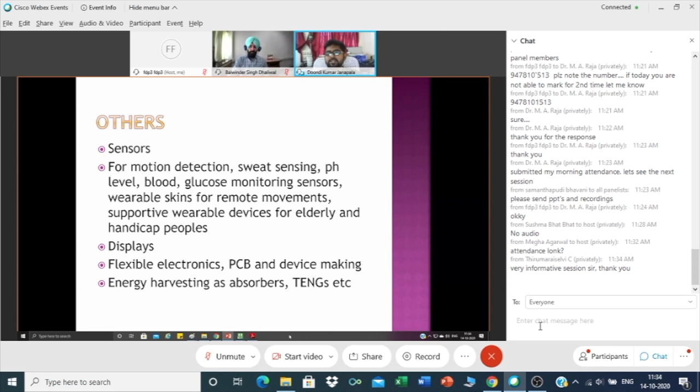Another area we are developing these polymers for is energy absorption, because I want to work with metamaterial absorbers using flexible materials - flexible microwave absorbers. That is the reason I am spending much of my time on this one. The polymer sponge that I showed is also used for triboelectric nanogenerators. You can look into how adding these impurities and increasing the high dielectric constant can improve the performance of TENGs. That is another research direction you can look into and work on.